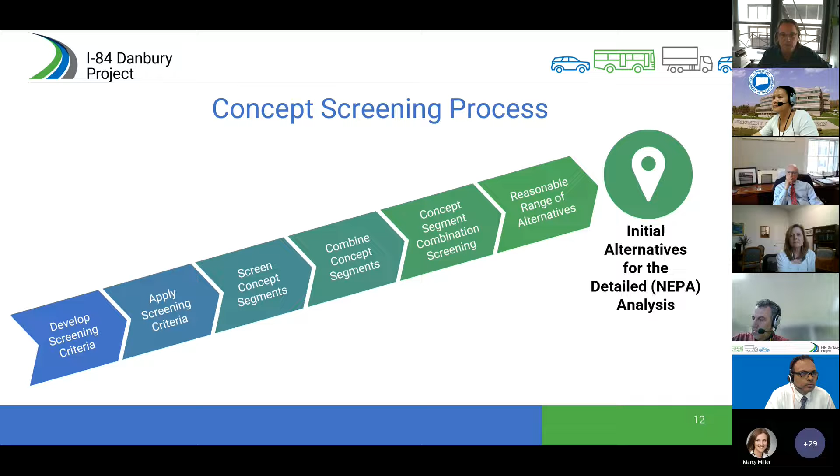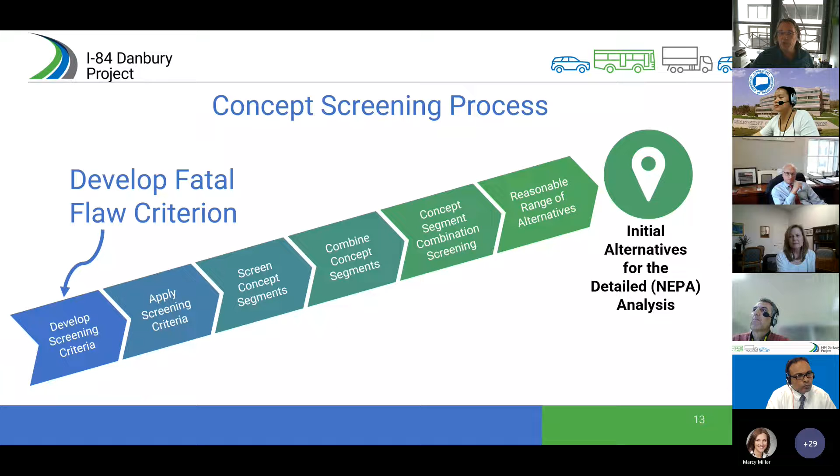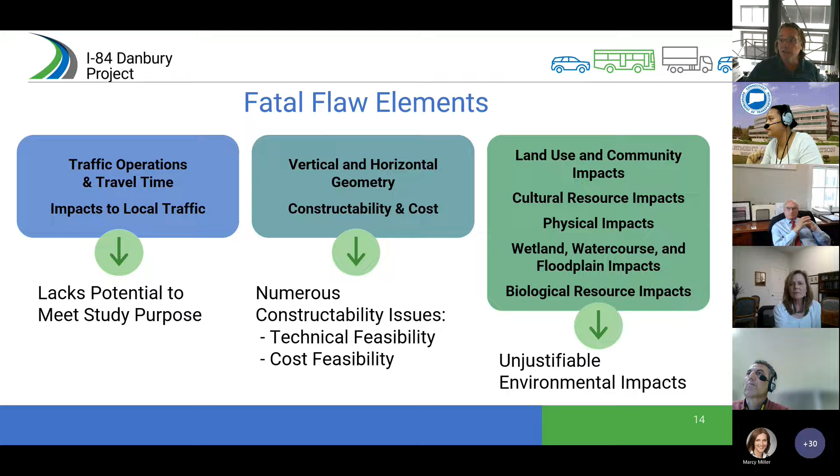We're sitting here on developing screening criteria, where we've developed some fatal flaw criteria. We had 3 elements that were fatal flaw elements, meaning that if a concept went through the fatal flaw screening and lacked the potential to meet the study purpose, or had numerous constructability issues, technical feasibility, cost feasibility, or unjustifiable environmental impacts, then that concept got screened out for the fatal flaw. So the fatal flaw analysis is the very beginning of applying the screening criteria.

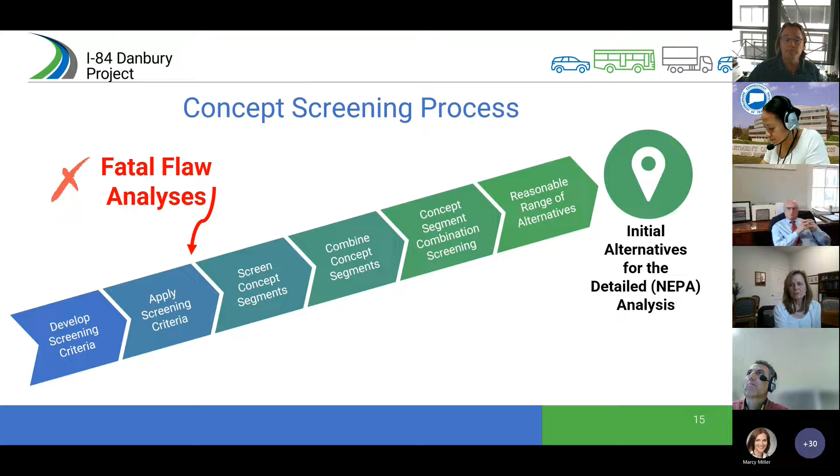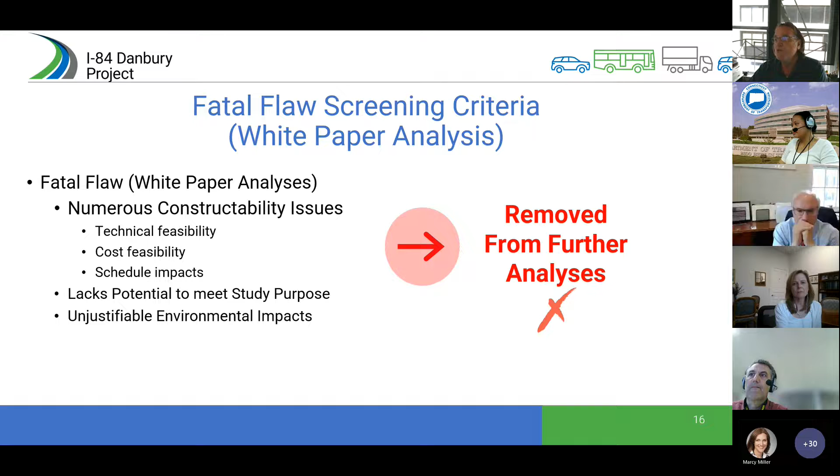Again, as we've gone through the white paper analysis, and you've seen most of the white papers—there's still a couple more to go up on the website—we've looked through that and identified the fatal flaw issues, removing specific concepts from further analysis.

An example of one that was dropped after the fatal flaw analysis—I'm sure we all remember the tunnel, concept number 7. The tunnel came north here, took off between exits 5 and 4, and came in past exit 2 there.

There were some serious concerns with this concept. One was that we have a water treatment plant that would be impacted, so there's the cost and construction of replacing it, perhaps interrupting service. This was a very huge environmental concern.

We also had neighborhood cohesion issues. There are 2 major neighborhoods that would be completely interrupted, with many people losing their homes and being relocated.

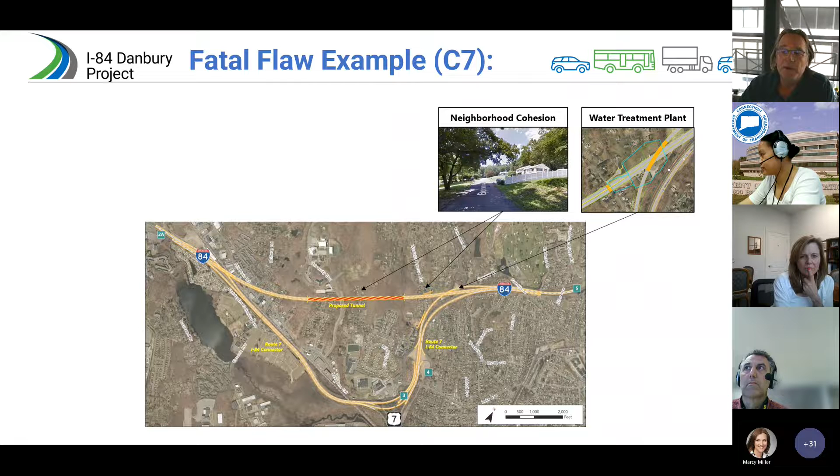Then there were engineering considerations. We had constructability issues where a lot of material needed to be removed. The type of drill rig required is few and far between in the country—they're very massive, so the cost and availability of the drill rig made the constructability issue huge.

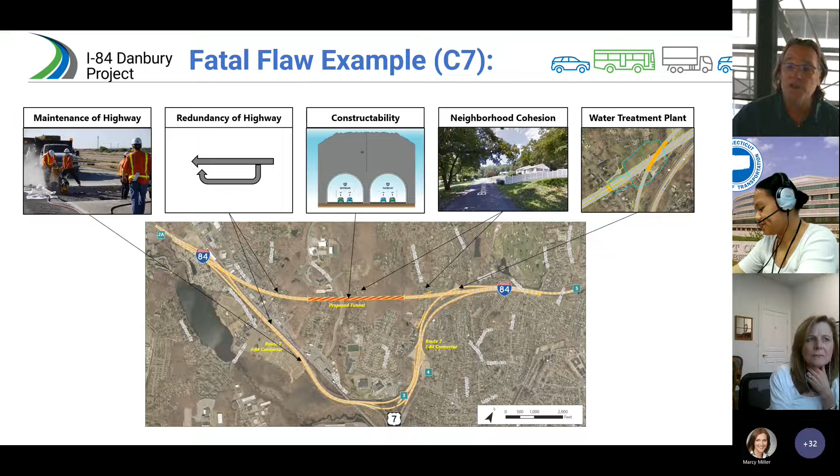We also ended up with redundant highways, having 2 different alignments now. What really happened with a lot of that is the maintenance—we've got a lot of maintenance costs and efforts and issues, not only on both of the highways but now also with the proposed tunnel.

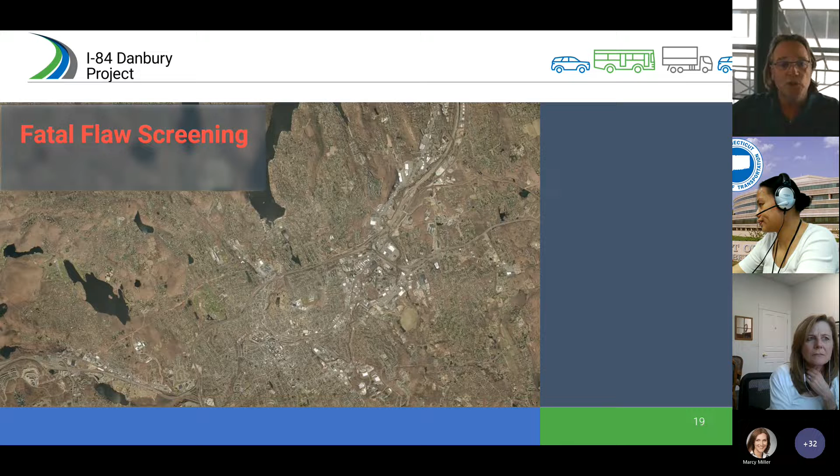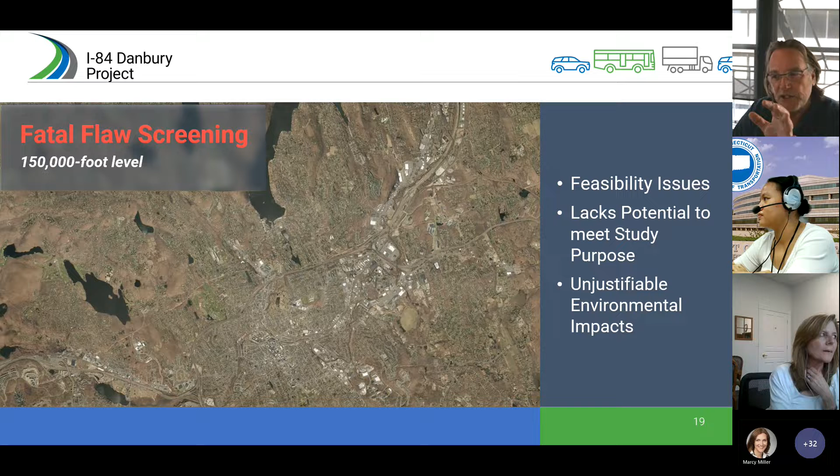With fatal flaw screening, I like to think of it as looking at something from a 150,000 foot level—a very large point of view. We looked at feasibility, the lack of potential to meet the study purpose, and unjustified environmental impacts. Those are the things at this big, huge, giant level that we're looking at.

Then you start zooming in, and now we're going to talk a little bit more about some of the concept screening criteria. At this point, we'd like to present some of the things we looked at from this kind of 10,000 foot level, if you will.

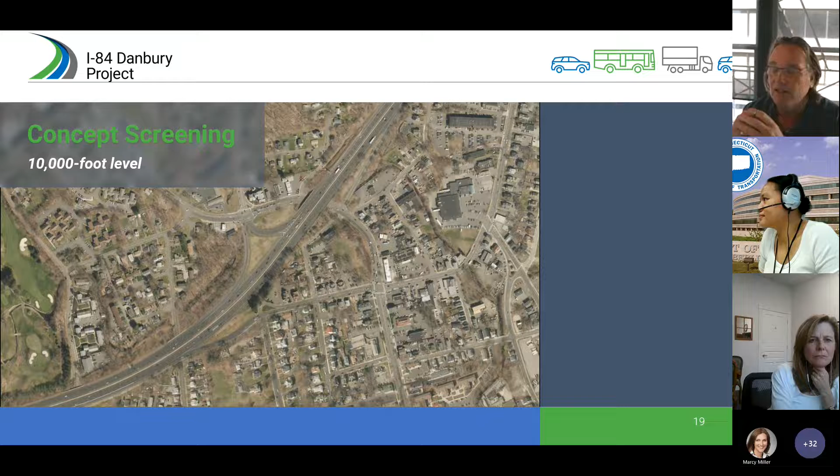I'm hoping that we get a lot of comments, hand raising, unmuting, speaking. Like Marcy said, we're an informal presentation here. And we'd like to get some buy-off on: do you understand what these concepts are? Are they the right kind of screening criteria for the concepts? Are there things we're missing?

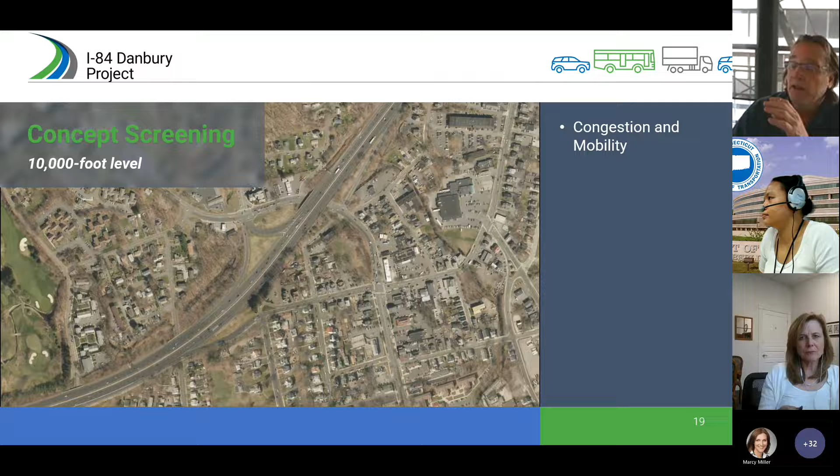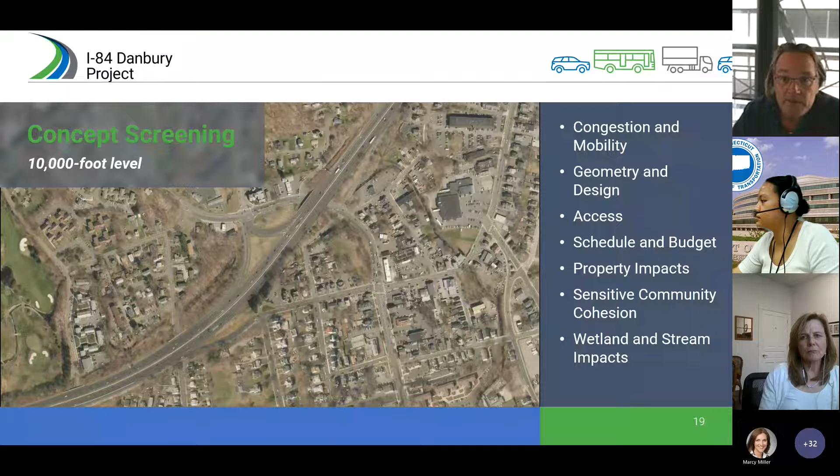So we're going to be looking at some things such as congestion and mobility, geometry and design, different access points, our schedule and budget, impacts to properties, sensitive community cohesion, wetland and stream impacts, and sensitive species impacts. Those are just some of the areas we'll be looking at.

We've applied the screening criteria for fatal flaw. Now, if you'll recall, when we're looking at this corridor, we've noticed that there are specific issues associated with different segments in the corridor. So we've broken the corridor into an east segment, a west segment, a central segment, and then one that goes through the whole main line.

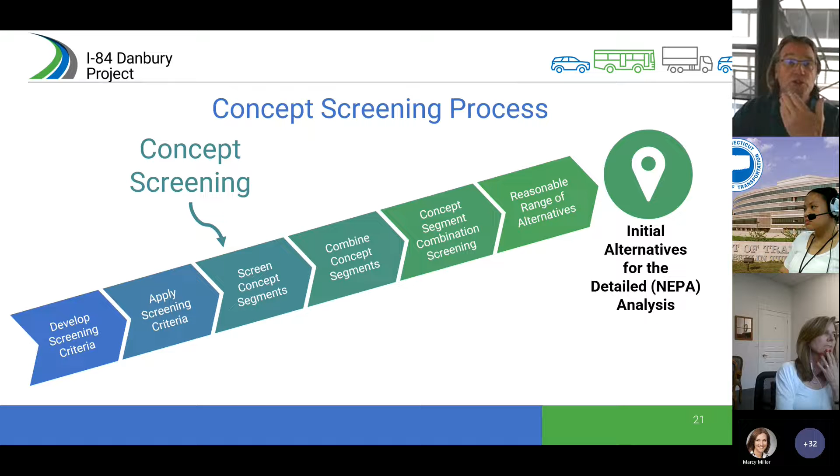So we are now looking at these concepts. When we were looking at the fatal flaws, we were just looking at whether this concept has any major flaw that means we should not build it. We're now in a different mindset. Within each segment, we're looking at all the concepts that could solve or address the issues within that segment, and we're comparing them one to another.

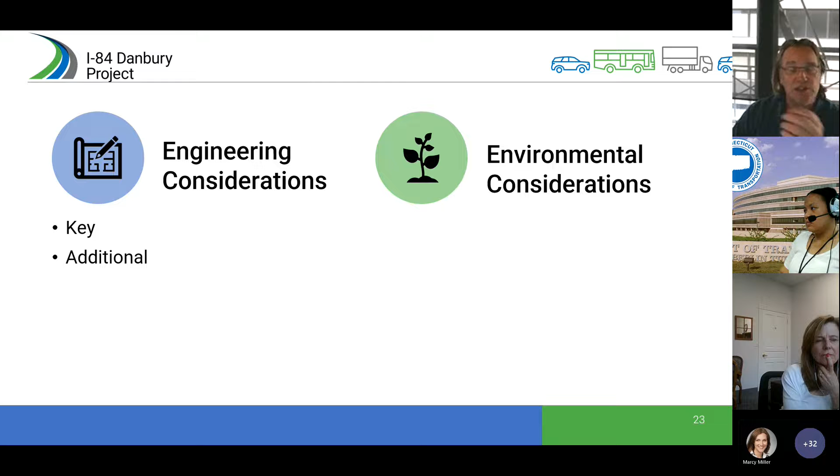In the past, we've listed out redundancy and high impacts. We've refined that concept to look at engineering considerations and environmental considerations. Under engineering considerations, we've looked at key considerations that really meet the purpose of the study, things that are very important, but we've also got additional engineering considerations. The environmental considerations are similar, but broken down into built environmental considerations — residences, businesses, community facilities — those are still environmental considerations, but in the built environment, and amongst those we have key and additional. Then we also have the natural environment, key and additional — things like wetlands or sensitive species.

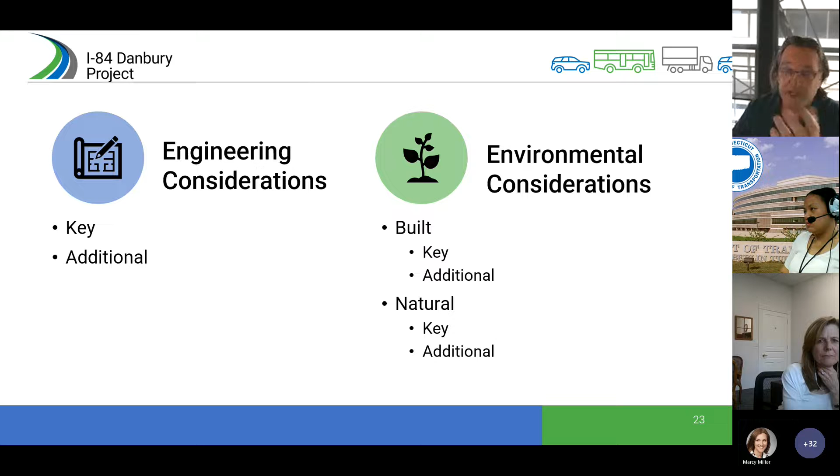So we're going to walk through some of these key considerations, and this could be painstaking if we hear crickets. We would love to hear from you, and I'll try to explain what the considerations mean. And if I'm poor in my explanation and somebody doesn't understand, please speak up, raise your hand.

So we're going to first look at key considerations, and the first subtopic is congestion and mobility. We've broken these into segments, and each segment has its own issues. For instance, one segment may have interchange issues where you can only get on at one street and off at another, not a complete interchange. Another may have congestion because of a left-hand ramp where people need to move all the way from the left to the right to exit at the next exit — that weave causes congestion.

These considerations we're looking at as examples today are centered around the segment we're calling the center segment. We may not be addressing all the issues for east, west, or main line, but these are the types of issues we're talking about. Once we go through these and get concurrence that we're on the right track, we'll develop these same kinds of considerations for each of the segments.

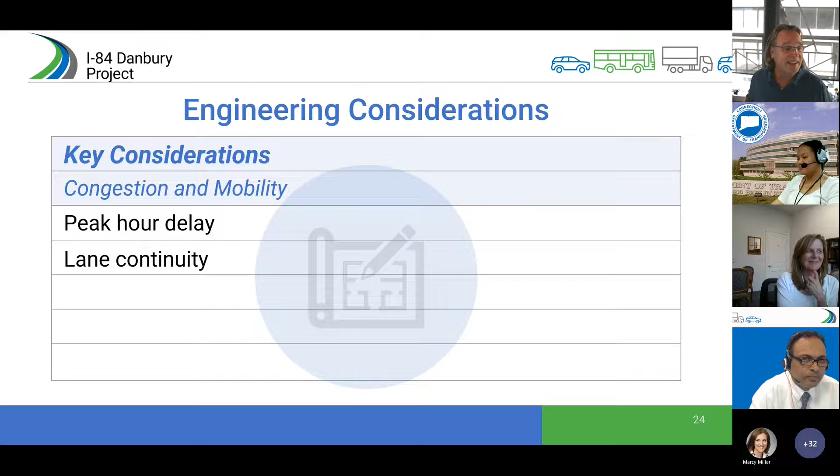All right, Rudy has raised his hand. So Rudy, want to go ahead? Sure, Rudy Marconi from Ridgefield. Question, if I may, Rick. Have you looked at future growth and business development along this corridor and the impact that they may have, both residential and commercial growth over the next 20 years?

Yes, thanks, Rudy. The study is looking at all of the past studies and the projection of growth. That's part of the study input. And from the study we present, projects will even be more dramatically included in the project analysis. But yes, without a doubt, we are looking at the continued growth and the continued potential congestion through this route.

Right, so that your peak hour delay and your lane continuity will take into consideration traffic growth over the next 20 to 30, 34 years, 35 years. Yeah, a lot of these studies go up to 40 years. So yeah. Thanks. Thank you.

It might be helpful, Sharat, for you to talk about what your traffic analysis considers as well. Maybe get into a tad bit more specificity that might be helpful.

Yeah, Rudy, the projections are to 2040. That's the out year. It extends to both employment growth as well as population projections. We use the census data and extract from it. And in fact, one of the key players here is New York. So we work with the New York MPO to get their projections and try to match them to the extent we can, especially since you're in Ridgefield, there's a lot of cross traffic between New York and Connecticut. So trying to get those projections in and making sure they work at least at the state line and account for future growth is part of the projection.

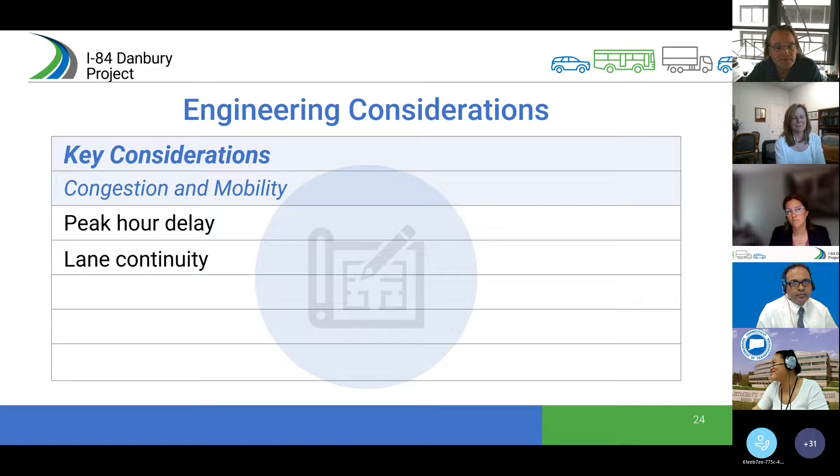Okay, so if there's no more. No, there are more. All right, so I have two more hands raised from people who want to speak up. The first is Chris, and the second is Frank. And then we also have Rudy. So Chris, why don't you chime in?

Yeah, I'll just make this quick because I know we want to try and wrap this up and continue. But Janine, I just want to talk generally, kind of off the record, from what you've seen so far with these designs, is it looking like there's going to be an environmental hurdle? Because I think it said at one point like 68 or 52 bridges through this corridor that are going to have to be revamped, and then there's also design, curvature, and geometry issues we're going to have to talk about too. But from an environmental standpoint, what's your take?

So this is going to be a very unfulfilling answer, but it's just too early to make that call. The screening analysis by its very nature is going to screen out those environmental deal breakers, things so egregious that we won't even consider the options further. Part of this, and Rick referred to them as unjustifiable environmental impacts - as we go through the screening process, at every single level we're going to be looking at the environmental impacts, and we will get there. Rick's going to go through the engineering, and then we're going to hop onto the environmental. At any point along that screening process, if we see something that's a hurdle too big to cross, those will be identified. But there's a lot more work that needs to be done to fully evaluate the environmental implications to answer that question. We're just way too early in the process.

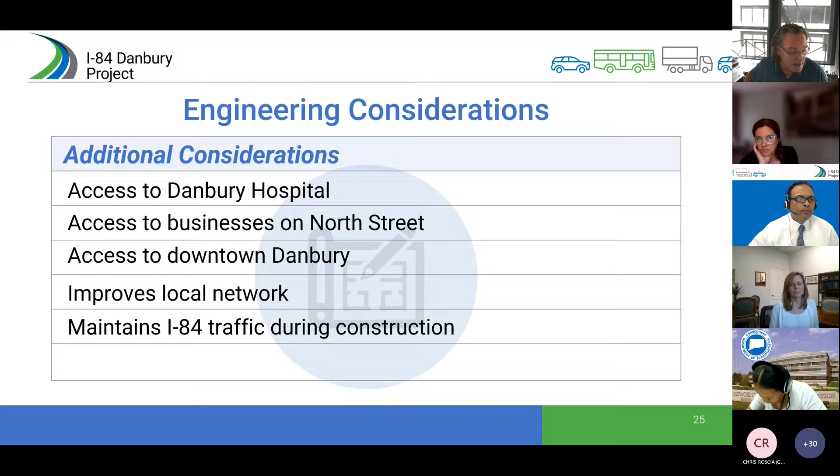Now, Sharad, do you have stuff you'd like to add for the whole PAC? Yeah, I'm just going to echo what you're saying, Rick. These are criteria that we're going to look to screen concepts. So I think to the level of detail of how well it improves the local network, it's going to be very hard at this point until these are taken further into the process.

But we'll certainly be looking at those access points from the highway onto the local network. And as you said, Rick, we want to make sure that any improvements on the highway and connections from the highway to the local network are not making them function worse than what they are. And to the extent possible, to make those access points improved.

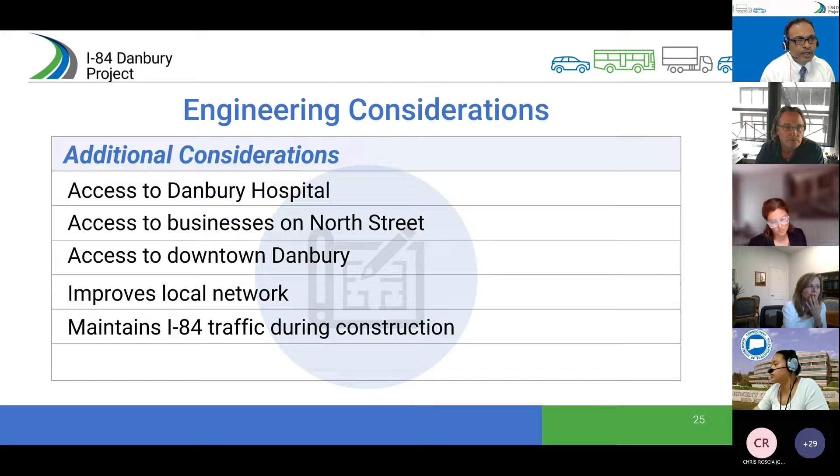And that's kind of where this process is right now, at a very early level. When we get into the next phase, where it gets into a little bit more engineering and design on some of these access points, that's where a lot of those things will be looked at more on the larger network. Can I just interject?

So you're right, and I understand that. My concern is just that the city hasn't really shown these are good concepts, at least with concern to the corridor itself. For example, at the last committee meeting, the city had mentioned the idea, there were some concerns around it, but generally it was okay. But that's as far as we really got with the city.

Like you said before, we don't want to have a highway where most people are getting on because that's their only choice. And that's what we have right now in Danbury. We could pull a lot of highway traffic off if you have roads that let local traffic stay off the highway, while New York State traffic, Newtown, Ridgefield, New Milford traffic stays on, since that's the long distance traffic. The shorter traffic is causing some of the disruption now, but the city hasn't shown any interest in really improving or giving ideas.

We've gone through this whole project and we have great ideas about the corridor itself. But we can fix the corridor to its utmost extent, and if the mainline issues in the city itself aren't fixed, then I think we're still running into a bit of a wall. So has anyone reached out to the city of Danbury?

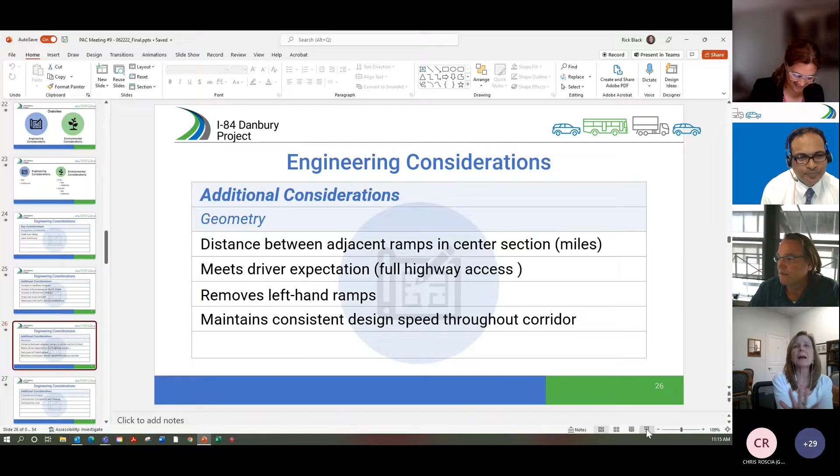Well, no. And Francis, once we get our end sorted out, you can start chiming in. Yeah, there you go. And I might just say one other thing while we're at it. At some point, it may be beneficial for the PAC members for us to go through the next batch of both engineering and environmental considerations, and then take the rest of the comments, just because I think some of the questions will be answered with what we're about to present.

Great. Thanks, Marcy and Janine. 2 comments. One in response to Chris's. WestCOG is aware of the circulation issues in Danbury, as well as in our other central cities, Stamford and Norwalk. We have been discussing the need for city circulation studies to look at circulation issues on the surface streets in the city. So that is a concept right now that may advance independently of this, but be complementary to it.

And second, looking at access, it looks like the list of engineering considerations are accessing areas that are challenging to access right now. So I'd have 2 points. One is we don't want to worsen access to locations right now that are not inconvenient to access. And second, there may be a case for improving access to the eastern side of Danbury between exits 6 and 8.

The Federal Road area, maybe Great Plain Road. Right now, Federal Road and Route 7, the 84 interchange just creates a lot of unnecessary movement that could be simplified potentially through a more direct connection between Federal Road and I-84.

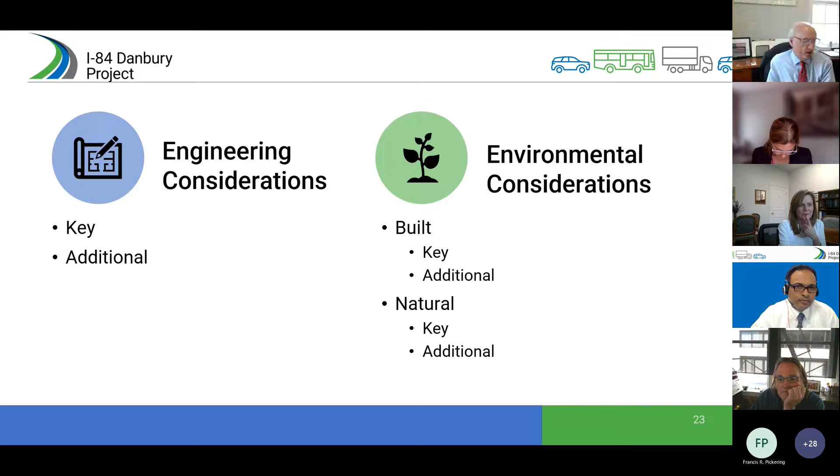A quick question relative to access to Danbury Hospital. Currently it takes our ambulances anywhere from 20 to 30 minutes in moderate traffic, and 30 to 40 with heavy traffic, having to take city routes and stay off 84. My question specifically is the access to Danbury Hospital. Will that be a limited access highway, in other words emergency vehicles only? Or will that be open to public traffic as well, with the eventuality that it will only delay access to the hospital again?

So Rudy, we need to remember, we need to drop back a hair. This is the planning study. What we're looking for is whether this is an important consideration when we're looking to screen criteria. We don't have a solution saying we're going to have a dedicated emergency-only off ramp or anything like that. We're just asking the question, is access to Danbury Hospital one of the considerations that should be used in screening, in keeping a concept or screening one out?

So my answer would be absolutely yes. Thank you very much, that's what we're looking for, that kind of feedback. That's all. Thank you. Thanks, Rudy.

All right, Alec, you're up next. Thanks, I guess one quick question. Will traffic safety be a screening criteria, or is that kind of wrapped up in lane continuity and some of the other ones that all end up producing safety?

That's a beautiful question, because that's one of the points I was going to talk about. You're exactly right, it will be addressed, because everything Federal Highways or ConnDOT does is done with the safety factor in mind. So for instance, reducing weaves, maintaining lane continuity, maintaining consistent corridor speeds, all of that has a safety component in mind as the design goes forward. Okay, great, thanks. Thank you.

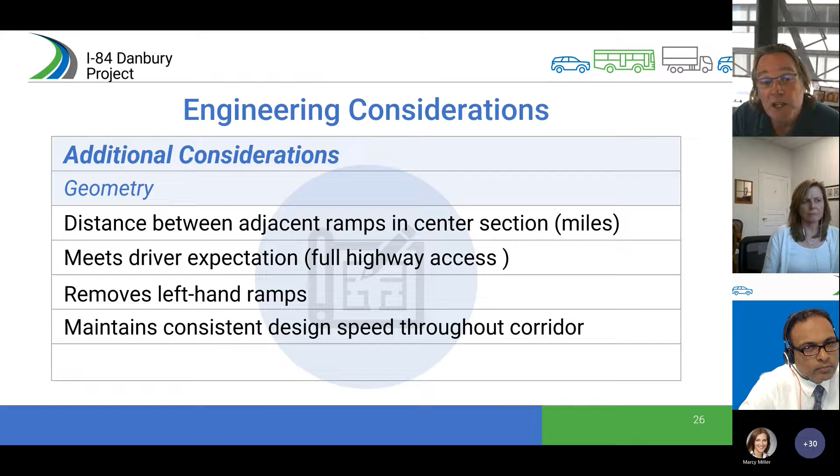So these four fall under our subcategory of geometry under additional considerations. And I would like to open it up to see if these are important to us to continue, or if we've missed something under geometry for considerations.

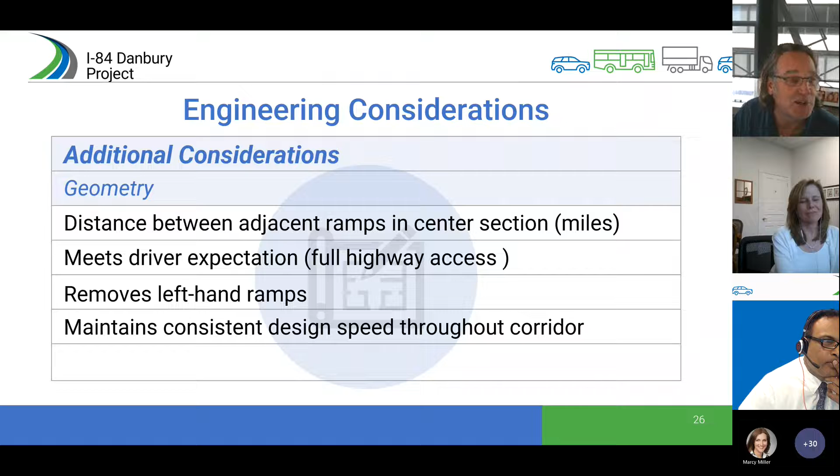Apparently we nailed it, Rick. Yeah, finally. Comments, no raised hands, Rick. But I absolutely love the discussion that this is generating. So thank you. All right.

So I'm hoping that silence says yes, and if you hated them, you'd yell out at me.

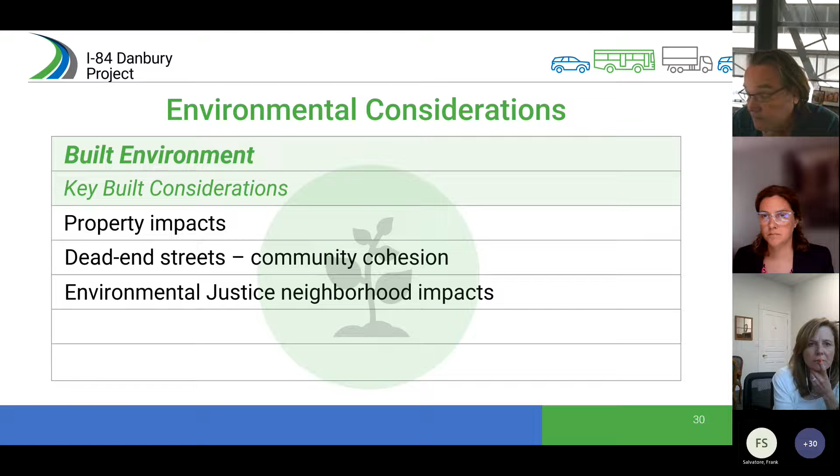So again, our built environment and our key considerations. Are we missing something? Have you seen something that raises a question? Have I explained it properly? If not, we'll move on to the next. I don't have any questions, Rick. I think we're ready to move on.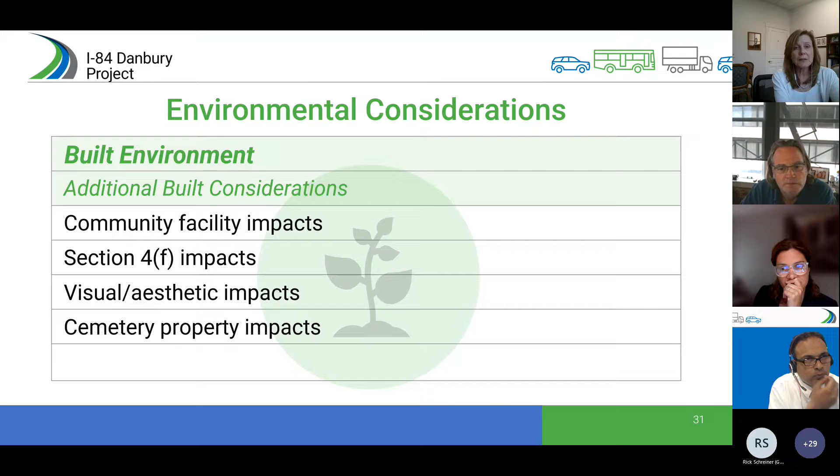Can I just add to that, at the beginning of this project, we did an extensive amount of work to identify existing conditions within the I-84 corridor, including historic properties. So we know where those hotspots are, and we will be well aware if any of the concepts intersect with them. Thus far we haven't had any for the concepts we've looked at, but that is absolutely in our view shed.

And I think that also makes me realize one thing was a little misorganized. You got prehistoric and historic under historic and cultural, and I believe those are under, I guess it's under additional built considerations where we're going to talk about it. But that was one of the actual consideration line items we have there. All right, I know we want to move on, but we do have one more question.

Perfect, comment from Chris. So I just want to know if there's been any consideration in terms of the build and how it could be enhanced to maybe prevent wildlife from getting onto the highway. I know we don't generally have a large issue with that through the 84 Danbury corridor specifically. I think it's a little bit larger in Newtown and into New York State.

But I think part of that, at least from exits 1 to 3, is because of the new lights installed, the LED lights - they're brighter, they're wider, and we've seen less, at least for me driving, since I live in that area, I've seen less animals on the road in my experience. But is there any consideration at all or focus on that when we develop this, or is that something that kind of just comes with the details? So Chris, that's a good question.

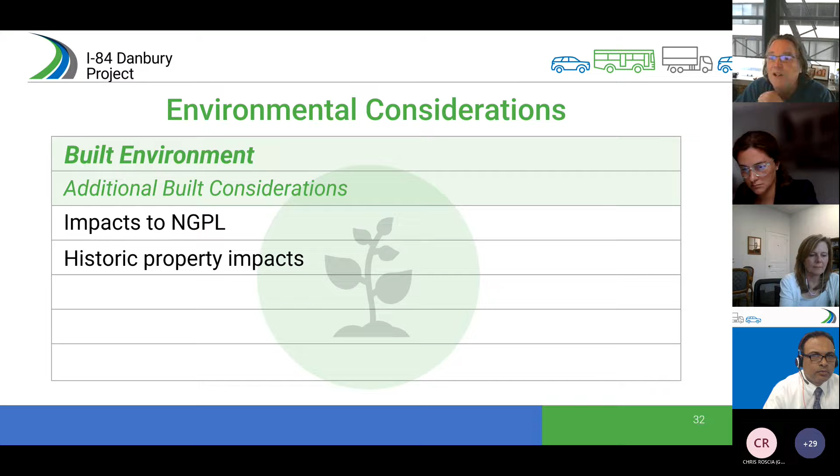All right, so now we've got the natural environment. We're going to go through key considerations and additional considerations.

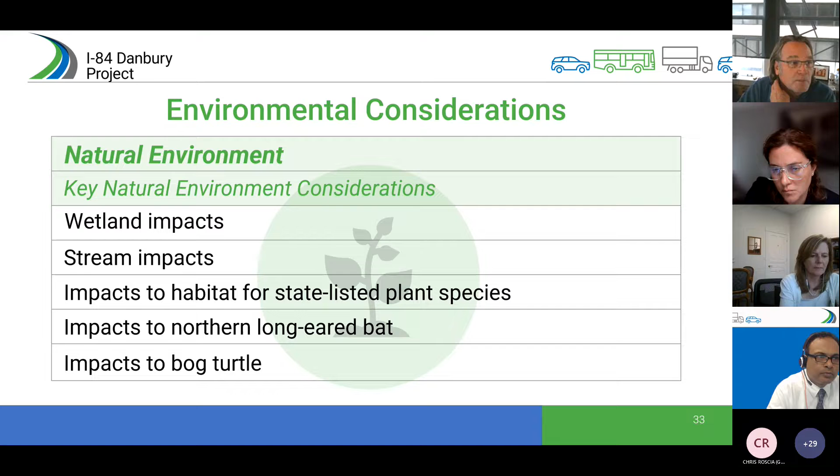Key considerations include wetland impacts, stream impacts, impacts to habitat for state-listed species, and sensitive species. Specifically, the long-eared bat and the bog turtle are of consideration. General wildlife would be addressed in a NEPA document if there's a project. But at this higher level, as Janine said about historic resources, there's been a lot of upfront work done to identify where wetlands are, where sensitive species are, and where cultural and historic sensitive sites are. As we've drawn through the map, we try to thread and avoid these, but there's no precision at this point, like one concept having 3.12 acres of wetland impacts versus 3.13 on another. There's no measurement - it's just, oh, that goes right through an important wetland, or we can avoid the wetland on this concept. It's at that level of screening that we're looking at.

So are there any discussion points around these key natural environmental considerations, or are there others that we've somehow missed?

We have Chris. Say that again - Chris, what happened, you have your hand raised? Oh, I did not, my bad, that was from last time. I'll lower it, okay, no, my fault. All right, let's keep moving, Rick. Awesome.

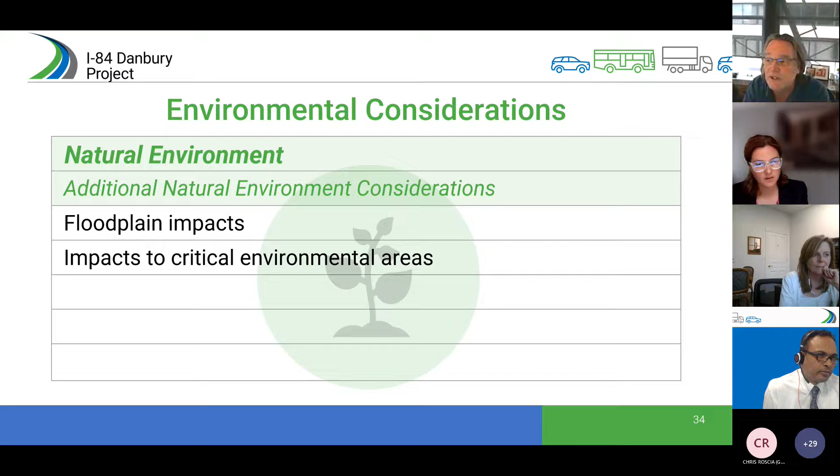So then we've got additional natural environmental considerations. We've got the floodplains, and we've got impacts to other critical environmental areas, which is a very specific definition. That then covers our environmental considerations. Now, I am not going to move on till somebody says I can, but we've got a few more slides we'd like to get through on the process. So are there any other environmental considerations we've missed that would be useful in screening concepts in or out, one among another?

James? Yes, James has his hand raised. But he also has... oh, there you are.

Hello? I just wanted to add a possibility of noise in relation to the highway, both during construction and once it's built, with increased traffic. Danbury's a pretty densely populated place. So I'm going to jump in on... oh, I'm sorry, you go ahead, I've talked enough.

I'm going to jump in on this one. So noise is crucially important and will absolutely be looked at. We've done baseline noise studies. These concepts aren't developed to the point where we could do noise modeling, but noise modeling will absolutely be done in the future as we consider projects. We're just not there yet. These concepts, as Rick has said a couple of times, are too preliminary for that level of detailed analysis. It is absolutely coming.

I just want to mention, were considerations about local businesses being affected by construction and operation mentioned earlier? Because I just remember doing a smaller project up at Exit 6, some long-standing businesses there were driven out of business. Deep's Hardware comes to mind.

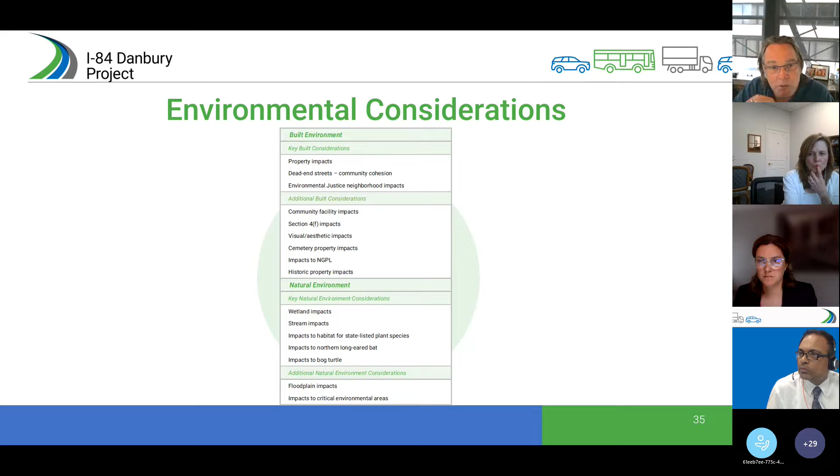And does that include construction? You bet. Construction phase? Okay. You bet. Thank you.

All right, all so right. You can move on. We've gone through those.

Now this is where we are going next. We are looking at examples of a process. In this conceptual example, we're going to present two methods that could be used to rate any one of these considerations. So this is an example, a conceptual example of applying a rating criterion.

Again, we've got a potential of four segments: main line, center, east, and west. We've been talking about potential considerations to solve issues or address issues in the center segment. Let's all put on our imagination hats—we've got four concepts that have been put forth that we want to screen one against another in the center segment. That's concept A, B, C, and D.

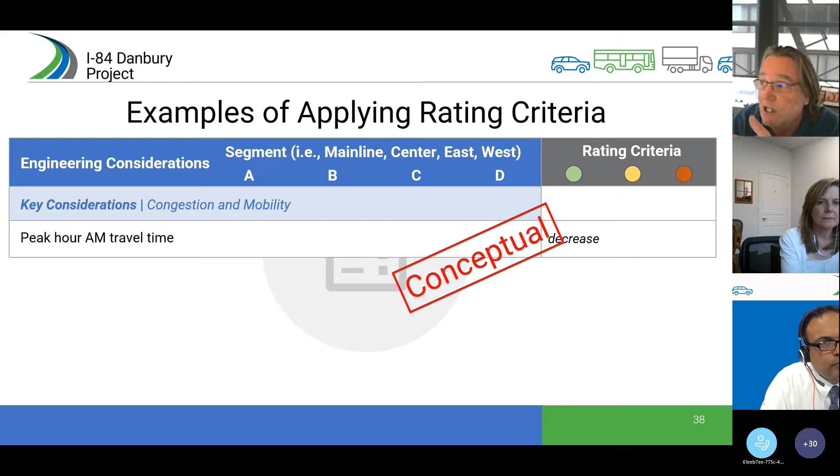So we're going to look in this example only at congestion mobility, only at peak hour morning travel time. We can do one of two things. We can say that our rating criterion—using green, yellow, and red—a really good alternative or good concept will decrease our travel time during that peak congested hours in the morning. The yellow says it doesn't worsen it. And the red may say it worsens it, it increases our time. So that's one way, a qualitative analysis of just generally looking.

And we then would assign A, B, C, and D a separate criterion. It'll either go a green, yellow, or a red. Now, the other way that could be looked at is a semi-quantitative approach.

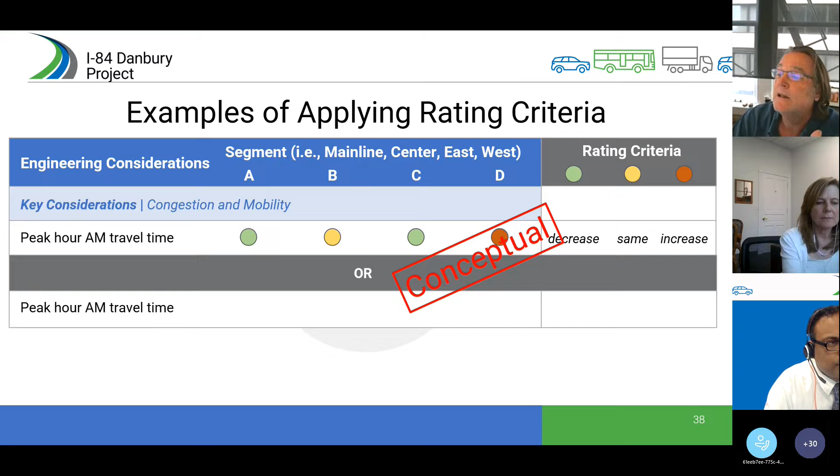Now, we aren't at the point where we can give Sharad all this fabulous information so he can detail a motion study and a travel study that gives us specific times, but we can do a back-of-the-napkin, larger-scale estimate. Let's just say, again using that peak hour morning travel time as our key consideration in this conceptual example, that green means we're decreasing our travel time during congestion by 25 minutes from point A to point B.

Or it's between 10 and 25, or it's worse than 10. So the red doesn't kick it out automatically—the red is just worse than green or yellow. So it doesn't stop the process like a stoplight, it just is not the best choice.

So these are the two ways we could go about looking at these different concepts, and then we would assign, obviously.

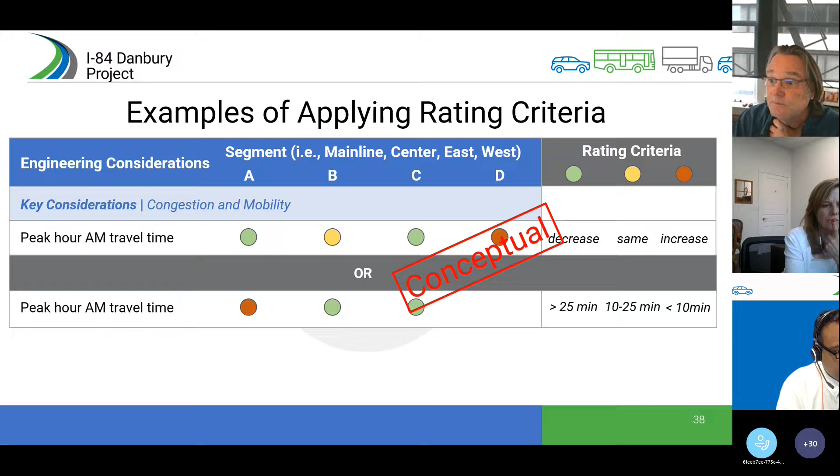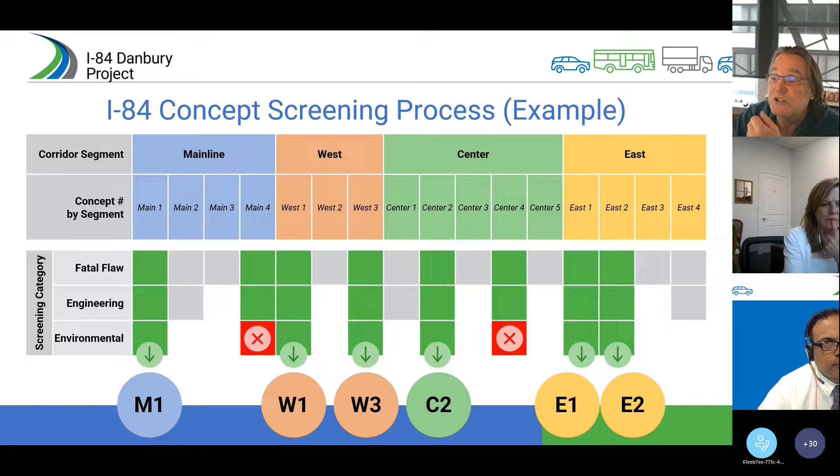So in this pretend situation, we end up with one mainline concept that made it through the screening process with the criteria we just talked about, and with a rating criterion process that we will refine and bring back to you guys. Then in the West, two concepts make it through, the center one, the east two. The next steps will be that we will combine the segments.

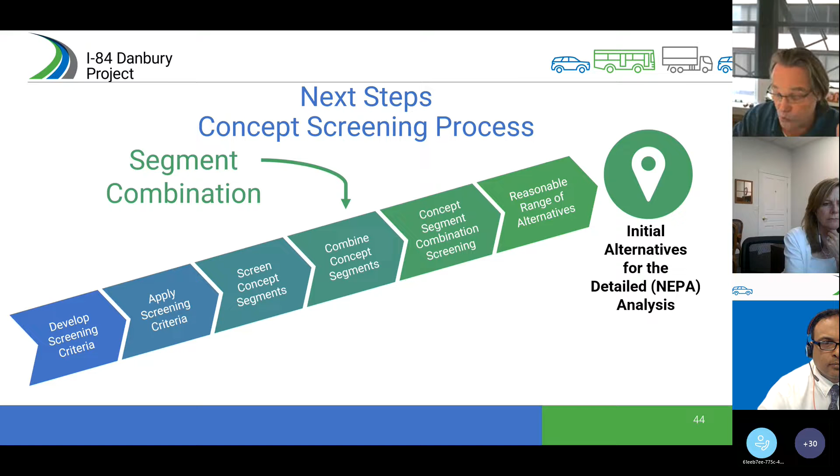So you can see an example where on the east segment, the perfect concept that made it through all the screening says we're going to expand five lanes to the north. But on the west, we're going to expand five lanes to the south. Well, how do you make that all work? Will those combinations work? So in our pretend example here, we have one main line, one center, two west, and two east, which would lead us to four segment combinations that we would then look at.

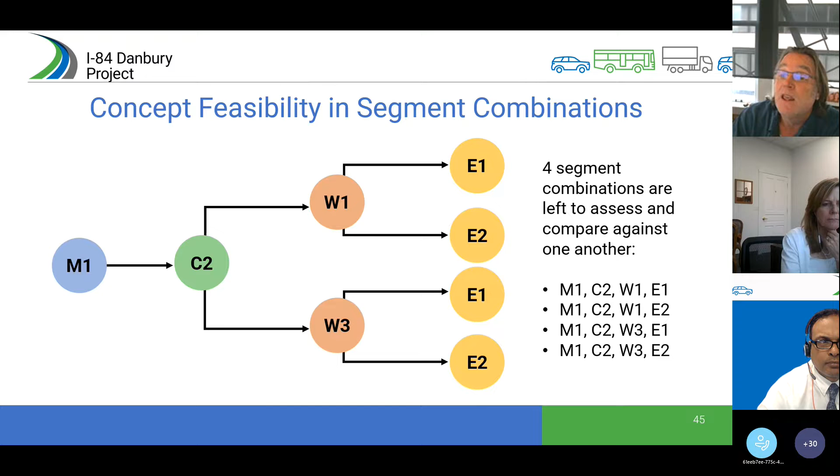Those segment combinations fit here into this concept segment combination screening.

And they then would go through a similar set of screening combinations. Are they feasible? Do they work together well? Will that west be expanded to the north and the east expanded to the south? Can you meet up in between? Does it work? Does it address congestion mobility? Are there engineering or impact considerations we need to look at? And once we come up with one, let's say 3 out of 4 make it through this screening, those could be put into that detailed environmental analysis that will be coming next, the NEPA analysis, as 3 of the potential ranges of alternatives. Other alternatives can come up during that NEPA analysis, but that's where these will fold into.

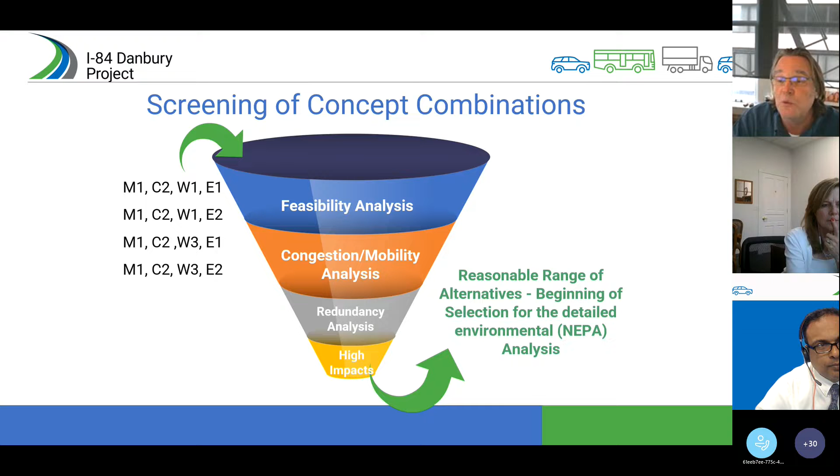So this, again, is the whole process that we're looking at. And I think that opens it up for my end of the presentation to take final questions, and then we'll get into next steps in the process.

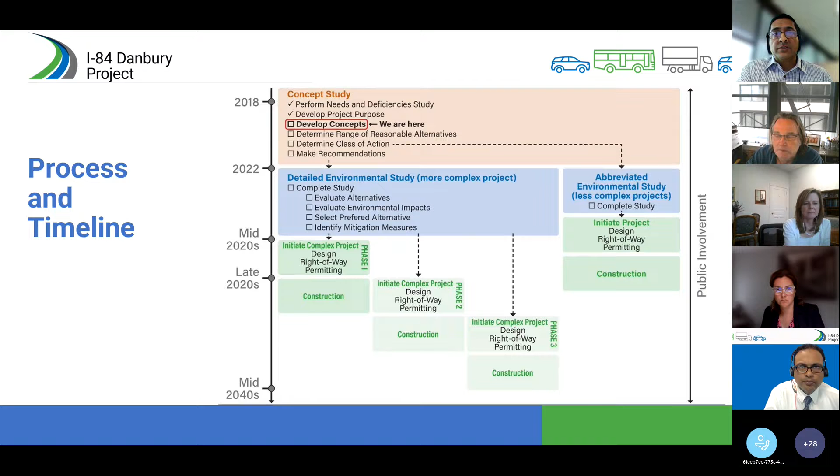So if you want to go to the next slide, in terms of the next steps, we covered that in terms of finalizing the screening criteria, screening those segments, those concept segments, as Rick mentioned, and then developing that reasonable range of alternatives. That's going to really get us to the point where we can move forward with the environmental study phase. So we still have a lot of work to do, and throughout the process, the public outreach will continue. I just want to make sure that was mentioned.

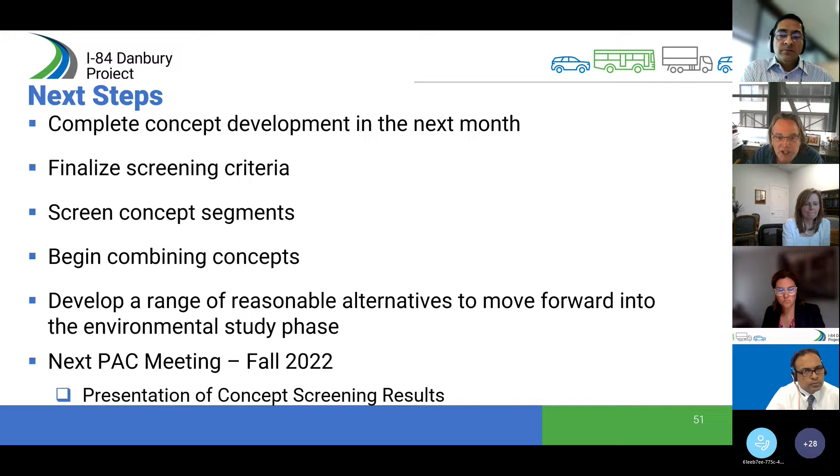Ed, Marcy, so I'm going to chime in here. The one thing, I just want to read one comment, Rick, that came in for you. I don't know that it deserves a huge response, but it was from Francis at WestCOG. He said we may want to consider light sky analysis, dark sky protection when the project gets into the later stages. So he wants us to keep that on the forefront.

And then I do have one raised hand from Rudy Marconi from Ridgefield. Rudy? Yes, thank you, Marcy. One last question, and that is the collaboration with the state of New York and the 684-84 interchange. I want to be sure, with Andy's retirement, I don't know who will be filling that, but hopefully communication stays open for a coordinated effort in this area. Thank you.

Yeah, I mean, I can chime in. And Rudy, I was a part of that. I set up that New York meeting that we had before, and we will continue to work with the New York counties and municipalities as they wish and as we feel we have new information to provide them. It was a great meeting. Just wanted to get it into the minutes. Yeah, all good, everything's fine.